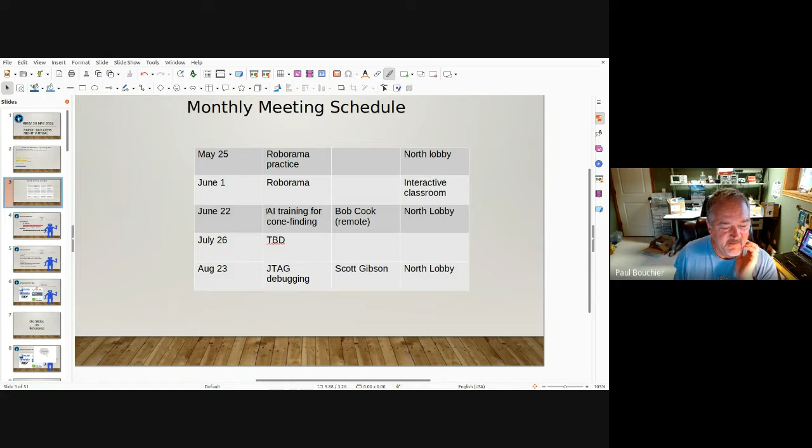We did have a change in dates. Come on, why aren't you advancing? Because I'm not clicking the right screen. So June 22nd is the next meeting after Roborama, and I'm very excited about that. Bob Cook from up north with you guys is going to be talking about his latest advancements in training AI for cone finding. This will be an all virtual meeting, so there won't be an in-person meeting at the Dallas Makerspace.

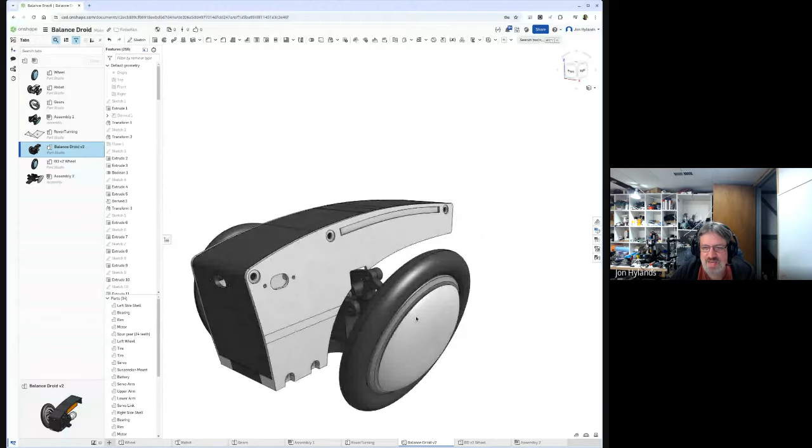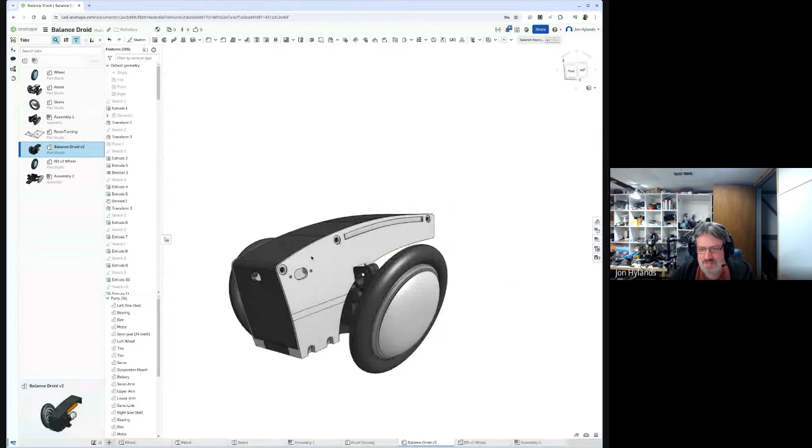So let me grab my window here. This is sort of the second revision of this robot that I'm designing. It's similar to his in that it's got the same sort of basic swept-back body shape, with a little jet engine thing here, and the wheels at a kind of funky angle. This one, as I said, is basically going to be a robot.

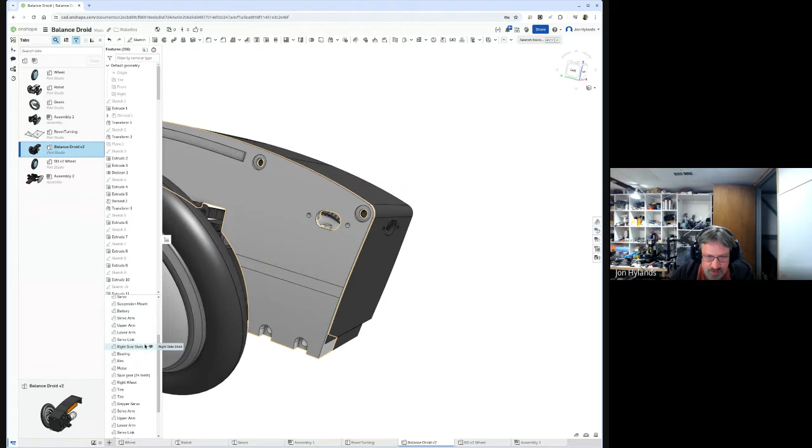If you look at the inside, I've got a battery. The IMU is going to be mounted here. The microcontroller, which is an ESP32S3, is going to be here. The motor driver's down here. There's a voltage regulator here. This big orange thing is the battery - it's an 1100 milliamp hour 3S LiPo. And there's a power switch at the very back that goes here.

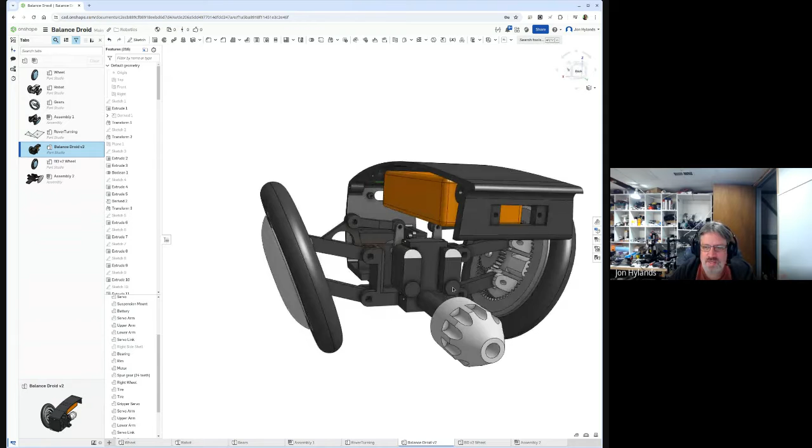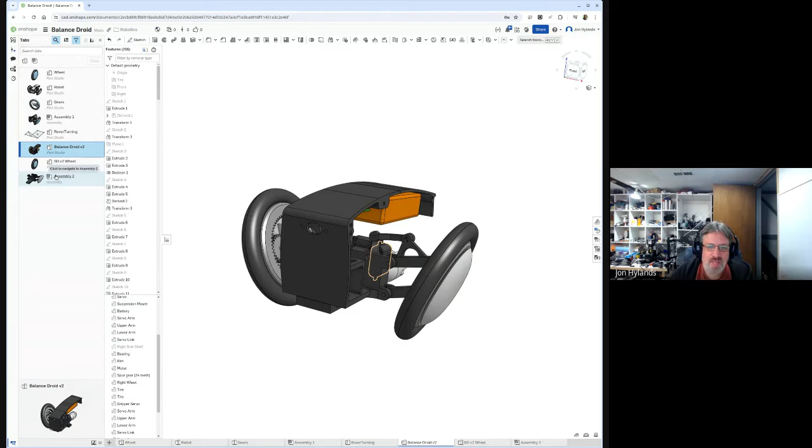So one of the neat things - I've modeled this in Onshape like I model everything, and Onshape has this interesting capability. The other thing this has is a couple of really tiny micro servos to actuate the suspension. One of the things I want to be able to do is test the range of motion of this thing. Onshape has these things called assemblies that you can set up - you basically import the parts you modeled, and you can set up relationships.

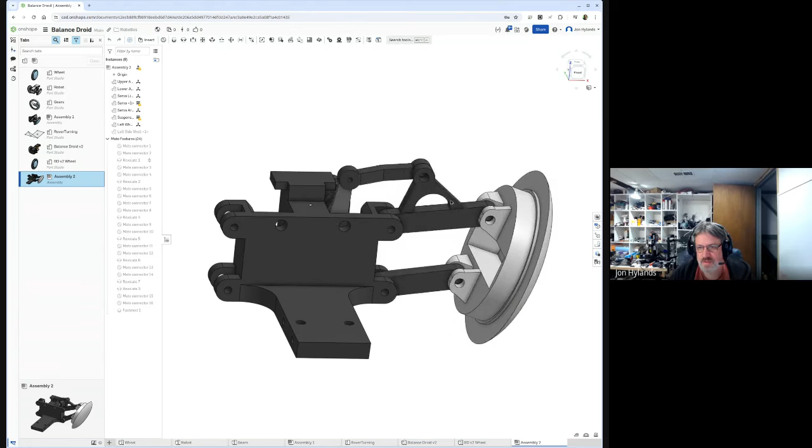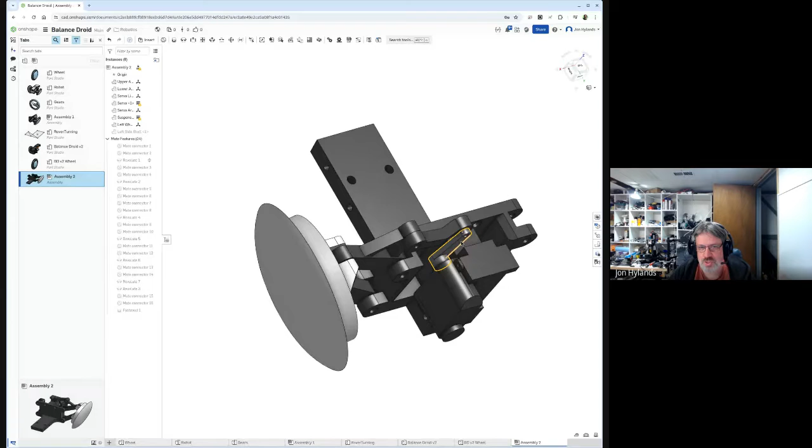You specify a mate on two different parts, and it's sort of like a pivot point in this case, because I'm using what are called revolute mates, which basically just rotate. So this whole thing constrains itself to move all of the parts that are connected with these revolute mates, including the servo arm here attached to the servo, which is also done with that. And that one I've actually restricted the motion of - in this case, it's minus 15 degrees this way.

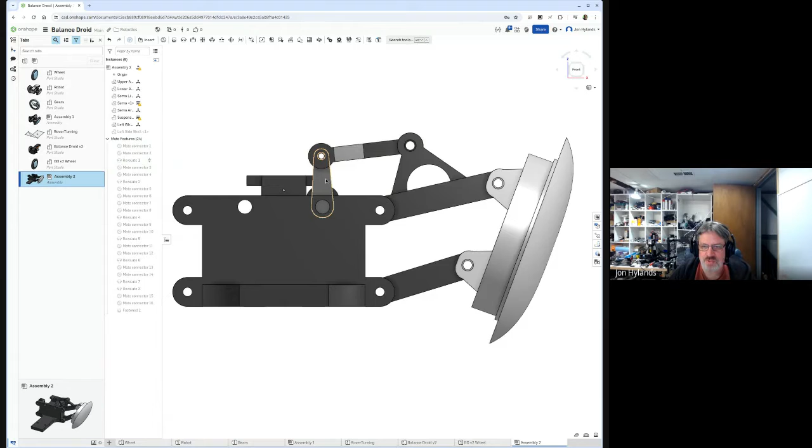So if I just turn this off here, this is basically 0 right here. If I'm looking at this from the front, straight up is 0. This is minus 15 degrees, and this is 55 degrees on this side - you can see it's a little bit more than 45 degrees. So that basically shows me how this thing will move when I've got it running.

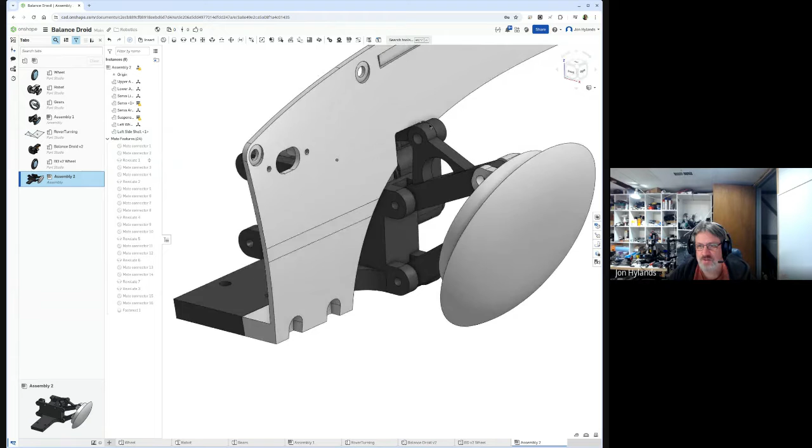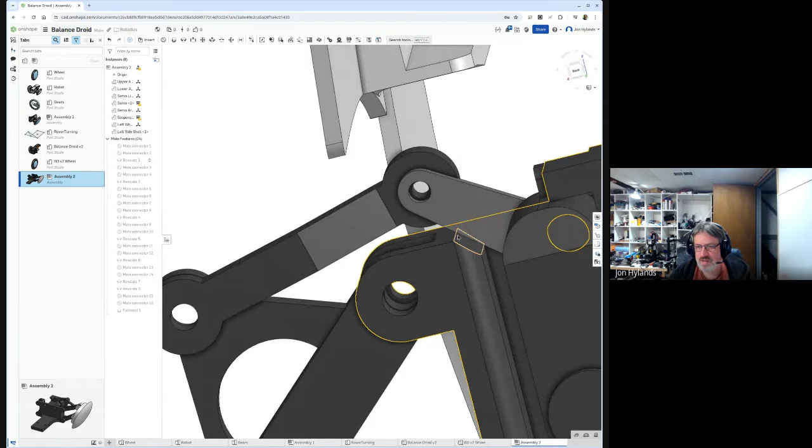And then I imported one of the side panels here so that I can look at the clearance. You can see there's a little tiny bit of intersection there, but I'll probably just make this a little bit rounder. And over here on this side, when I'm all the way down on this arm, I actually beveled this part so that the arm can go down a little bit further and make the suspension go down, which will basically raise up the body when you do that.

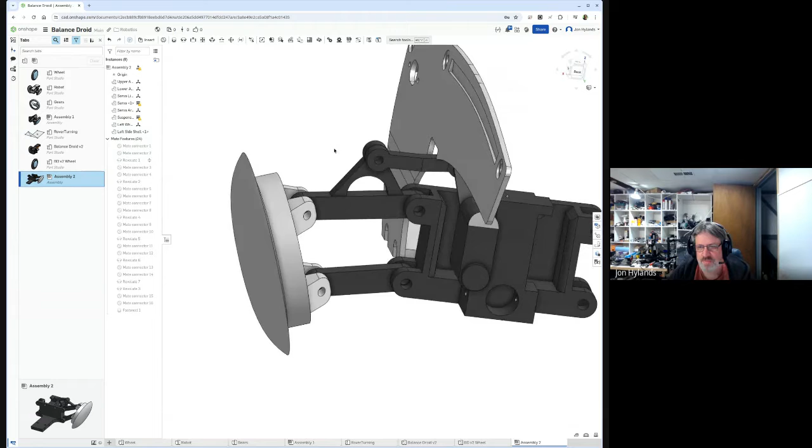So anyway, that's one of the neat features of some of these advanced modelers. Fusion 360 does the same thing - you can set up assemblies like this with constraints. And SolidWorks, of course, which is kind of what Onshape is based on. So anyway, I've been - sorry.

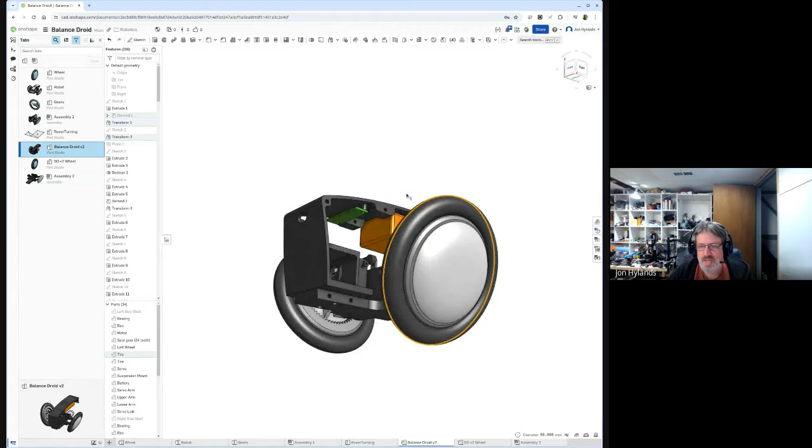What size is the wheel? This wheel is 90 millimeters in diameter, so it's a little under 4 inches.

So for instance, let me go back here and stop sharing my screen. If you look at my monitor, this is half of a wheel. This is printed in TPU, so it's flexible.

So I'm just in the process of printing the wheels now, just printed this morning. But I've got a lot of the other parts already printed, with how these things are going to go together - the side panels and the front piece. Designing a robot like this is always a bit of a jigsaw puzzle when you're designing it completely 3D printed, because you have to do the whole thing in CAD and then print it out.

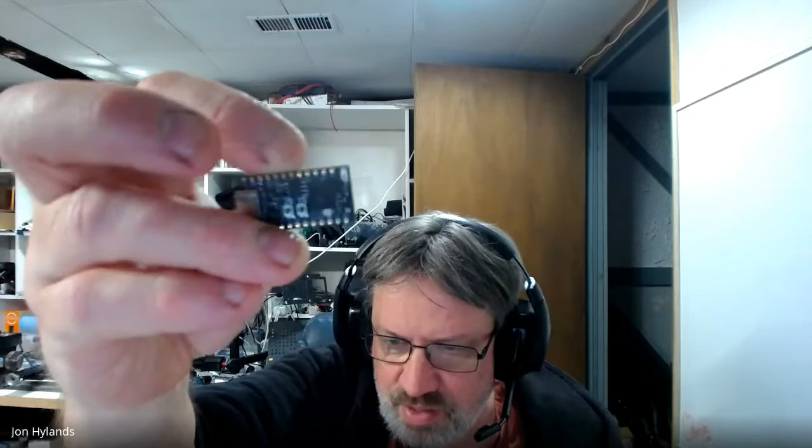So this is the main part. And for instance, this is a board from Unexpected Maker, called a Tiny S3. It's an ESP32 S3, you can kind of see it there. It's got 8 megabytes of PS RAM and 8 megabytes of flash, and I run MicroPython and we have access to that.

It's going to sit in a little slot I've got there, and you can see from underneath, there's little pins. There's a couple slots where it's mounted that are holes, so that board goes there. The motor driver sits in another little indent down in the bottom here. The 9-axis IMU I'm using is the Adafruit BNO 085, and it goes on this thing just like that.

So it's sitting at kind of a 90 degree angle. Normally you mount an IMU like this, but since it's a 9-axis IMU, it really doesn't matter which way you mount it. And on this side, I have one of these little Pololu 5-volt, 5-amp switching regulators, so it's going to mount basically right on this side like that.

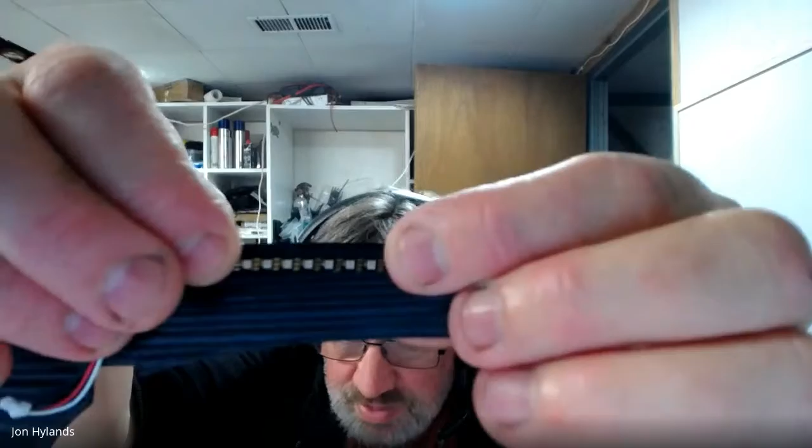And then if you look on the side of the model here, there's kind of a slot - you can sort of see it there between my fingers. I have these little NeoPixel, very small NeoPixel things, and they're going to basically sit inside that slot like that. I have to solder a couple of them together for each side, but then I can make all kinds of glowy light patterns and stuff.

Very cool. Any plans for an eye? That seemed to figure very bigly into Adam's visual concept. So next rev, sure, because I'll want something like a Raspberry Pi Zero if I'm going to put a camera in it.

But the thing that I was thinking would be really cool would be to build one of these with about a 6-inch wheel, and then I could use a brushless motor like one of these - this is a big one, I think it's 92, almost 4 inches in diameter, 90 millimeters. So this is one of these big, powerful brushless motors. I'd use that as a hub motor, and then if the body's that much bigger, I can put a Raspberry Pi in it, an OAK-D Lite camera, whatever - all kinds of different things. So that'd be kind of neat.

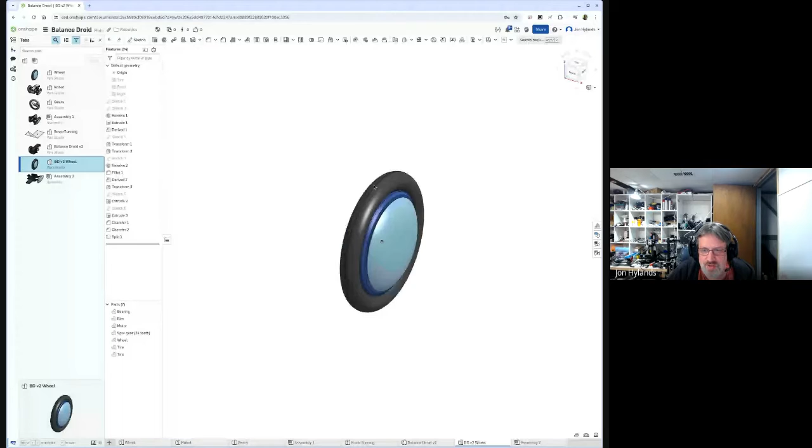I'll go over to where I developed the wheel here. So the idea here - we'll just get rid of the spur gear for a second - this is the right angle motor, or the motor with the right angle gearbox, with the shaft coming out like this, and then a spur gear that the motor's driving, which then drives the wheel itself.

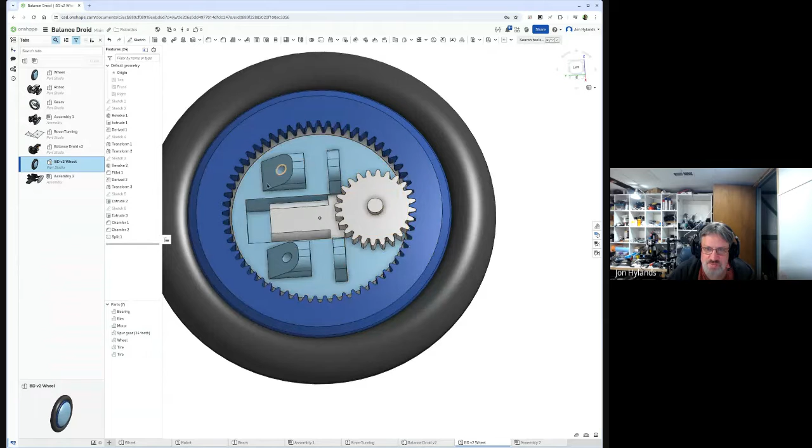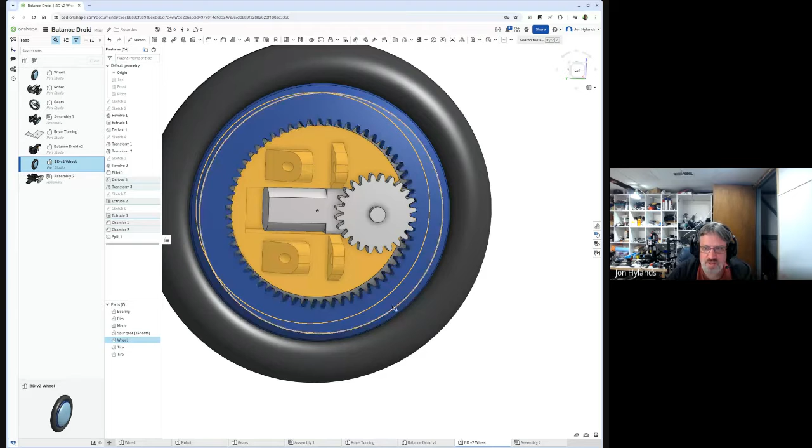This part here - whoops, that's not what I wanted to do, I wanted to do this - this part is fixed to the body, and there's a very large ball bearing, like 3 inches in diameter, or two inches in diameter, that's inside here between the wheel and the rim, which is the part that has the gear that actually rotates with the tire. So there's a big bearing, you can just sort of see the bearing right there.

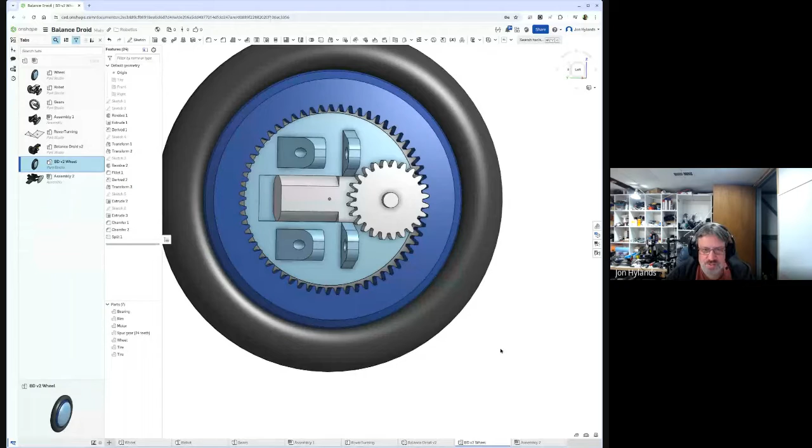Wow. I like the whole thing, and you can see it in there. So yeah, this basically drives it on each side, and the gear motors that I bought come with encoders, so I'll be able to do accurate distance and straight line runs and that sort of thing with it. There's an encoder built into that tiny thing?

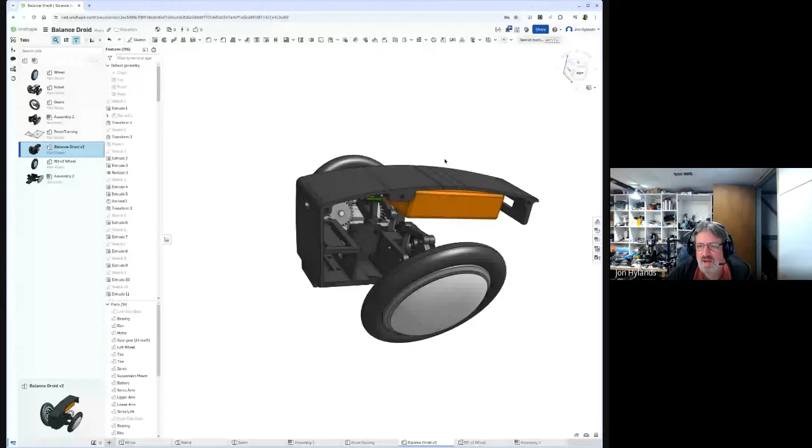Well, that's really cool. Do you have any techniques you're using for getting it so it's going to be reasonably balanced when you assemble it all? Well, let me show this guy here, sorry. So if you look at it, right now the battery is a little bit on the back side, and the microcontrollers and stuff, which aren't very heavy, are all in the front. So I may have to actually add some weight to the front.

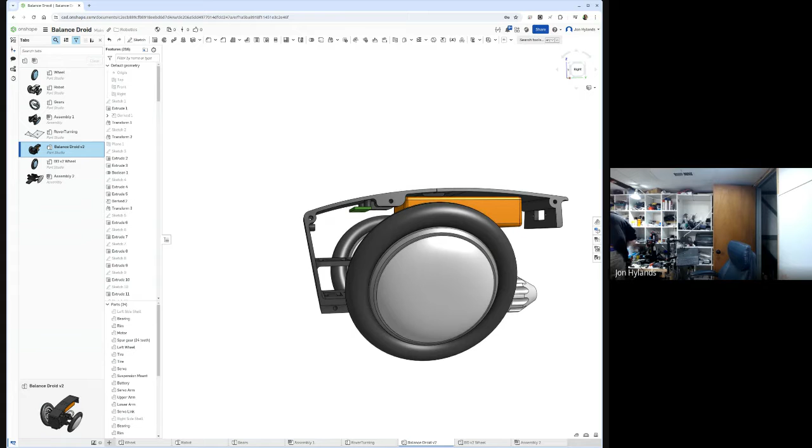One of the things I'm considering, I can just use a brass bar, but I have this right here. Oh, here it is. If you look at my screen here, this is a 1/2 inch diameter brass rod, solid, very heavy. I also have a 3/8 inch diameter tungsten rod, which I can cut with great difficulty. Tungsten is actually quite a bit heavier than brass. It's heavier than lead in terms of density. It's not as heavy as gold, but it's heavier than lead.

It's why the military uses it in the normal armor-piercing rounds that aren't depleted uranium. But anyway, it's an interesting weight. I might just use brass though, but the idea is that once I figure out exactly what I need, I can add a piece of weight up at the top, because with a balancing robot, you want all the weight to be at the top. So I'll add a piece of brass or tungsten up near the top to make it sit properly. And because I'm 3D printing these things, I can just print a bracket right into the part that the piece of metal slides into.

Cool. So it's like, see how it turns out and then adjust. Basically, yeah, that's kind of how I build robots. I'm not a big believer. I understand people like to do all kinds of mechanical fluid stuff and density calculations, and I just don't care that much. I'll build it, and if I need to add a little weight to the back or to the front, then I'll add a little weight to the back or the front.

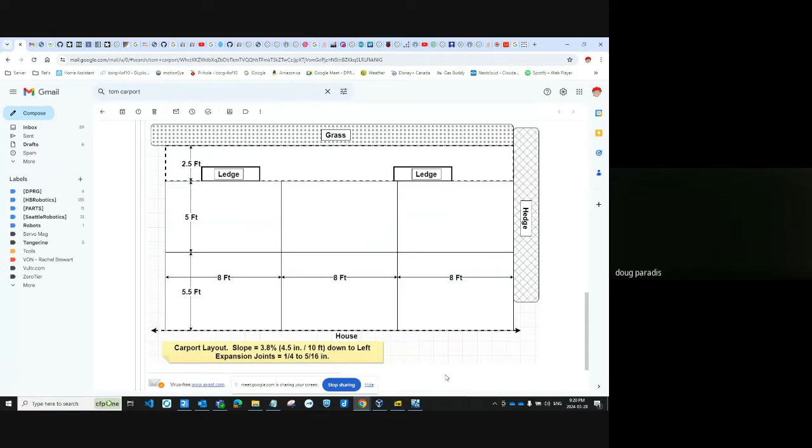So what I'm looking at is it looks like it's 14 and 8. It's 22 feet long and 10 feet. Yeah, it's about 10.5 by 24 roughly, the area. Well, you got to have space for your robot too. Exactly. So I'm wondering, is it possible to narrow the width? We can go long, but narrow the width for the 10.5 feet that we have to allow for a robot path.

Are you trying to match the perimeter length? Why don't you do this, guys? Let's see. If we were sitting at 12, that'd be 48. If you were at 8, that'd be 16, and so that would leave... Oh God, come on, Doug. Mind's a horrible thing to lose, guys. Minus 16 would be 32 divided by 2. Okay, so why don't you make it 8 by 16? So if I make that 8 by 16, I don't think my robot's going to fit through there.

Well, you got 10 feet, right? Oh, I see what you're saying. So my robot is almost 16 inches wide. Well, then go 6. So is that an issue if we went 16 by 6 or something like that? Or could you do 20 by 6? Hey, Pat, you can go outside those ledge sections. They just hold up the outer edge of the carport, and they have concrete and grass on the other side. So you can go outside of those.

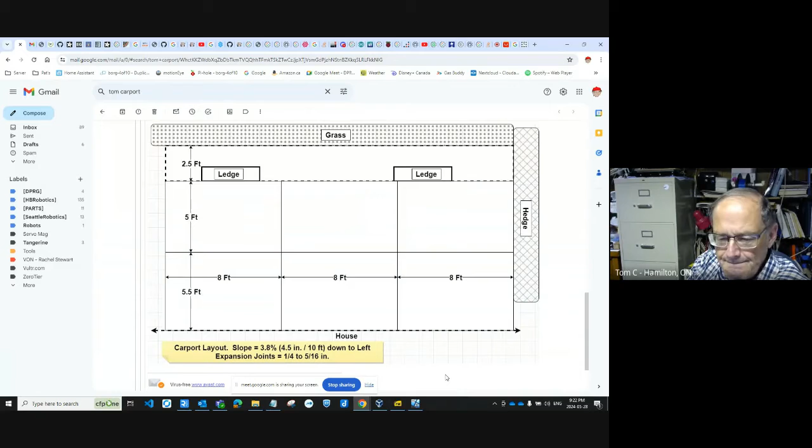I'm a little confused. Yeah, me too. But anyway, Pat, just make it as big as you can. Okay, we'll confirm with you all before we do that. All of you guys got to agree ahead of time, though, so that if you're running in four squares, nobody wants any surprises when they get there, because there's nothing worse than programming on the day of the competition. So whatever you guys decide on, make sure all of you know about it and agree to it.

Right. So, Doug, are you trying to match perimeter run length with what's happening in Dallas, so that from a timing comparison it's similar? Yeah, perimeter run length is the one thing that I would try to match. So what's the perimeter in Dallas? It's 48 feet. Realistically, when you run these contests, there's a lot more time involved in the getting ready and setting up and starting and finishing and measuring where it ended up than there is in the actual runtime around the course.

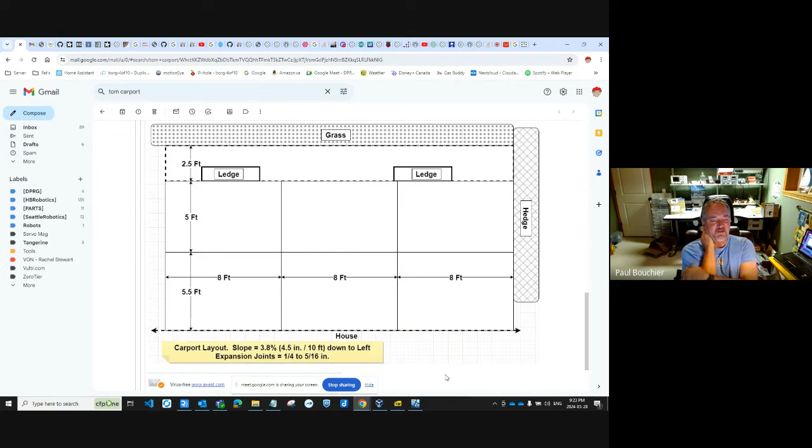So I don't think you need to be worried about trying to match runtime to try and achieve the same cadence as we're doing in Dallas. I don't think that'll be an issue. Yeah, well, once you have the course set up, now let's kind of go over a little bit of it.

For four corners, generally we take a spot on your robot. You pick the spot on your robot, okay? And so it's got to be on the outside edge, guys. It can't be the center of the robot. It has to be something where a guy can drop a pencil along the edge of your robot and make a mark. Yeah, front edge of the robot or something like that. Yeah, around on the edges. Usually we do the center or the front.

Yep. But okay. And so you make a mark on the ground, usually on blue tape. All right. Okay. And then you make your run, take another piece of blue tape and make a dot on that one. And then the distance between those two pieces of blue tape is your distance. Okay. And I believe the rules say that if you're within, I don't remember if it's a quarter of an inch, you're just considered perfect.

And the reason for that is you don't want somebody going and say, well, I'll do it in metric, I'm 7.5 millimeters, where the other guy says, no, I'm 7.4. You know, we're just going to say, well, if you get within 6 millimeters, then you're good. Then you're going into time. If you get guys that both have 6 millimeters, you're doing time.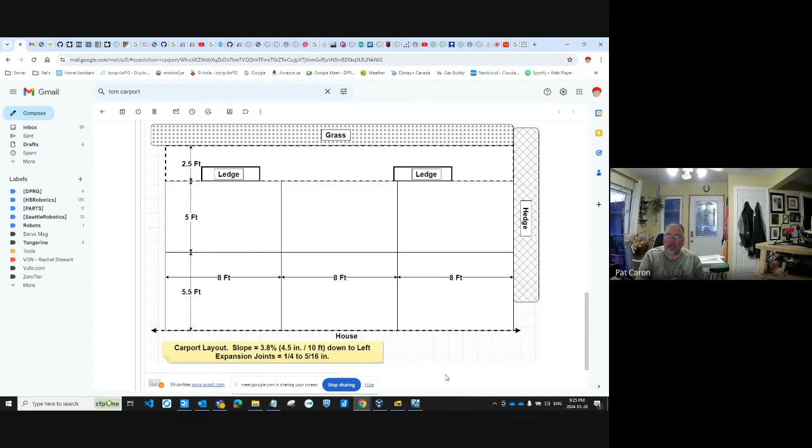Okay. The other question I had is the start location on the course. You can choose direction and starting point, and there is a smart way. Otherwise, if you start in a corner, you're going to end up having to do an extra 90. Exactly. So I started halfway down the long edge when I did my last course, and that's perfect, Pat. That's a good idea.

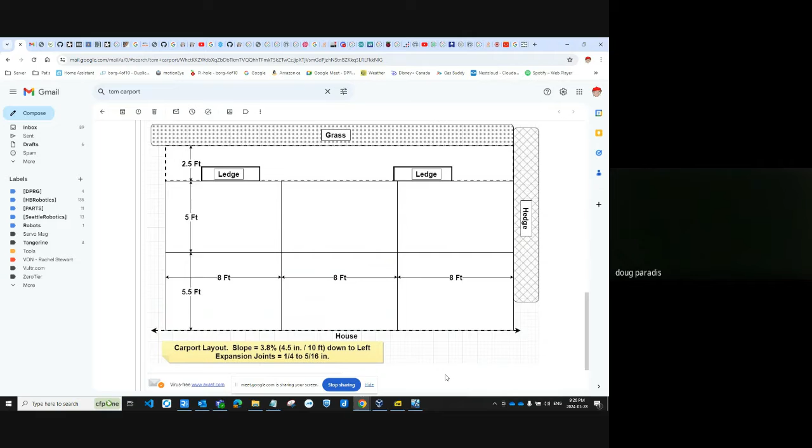And like I say, usually your robot will run better one direction than the other. I mean, in truth, you're supposed to tune that out, but there comes a point where even tuned out, one way is going to be slightly better than the other way. So you pick the direction you want it to run. And you guys are probably not going to be used to this course because it's just going to be set up right there, and you never practiced on it, unless you do it right before the runs. And so you might end up putting a little offset into your position or something at the end.

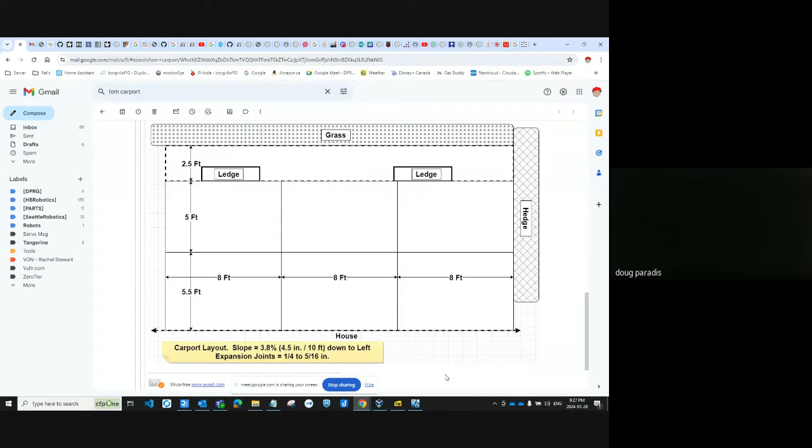Hey, Doug, you said that if multiple robots achieve a perfect score, time distinguishes between them, but that's not in the rules as far as I can see. Yeah, I believe it does. I believe it says that if there's a tie, then speed. I'm pretty sure. I don't think so, because let me just share that.

So here it says, since it's hard to determine accurately distance less than a quarter inch, robot scores less than a quarter inch will be considered to have a perfect score. Where multiple robots have perfect scores, they'll share first place in the competition. I guess we said it that way, this one. That's different from every other contest. Dave Anderson must have got to me. Okay, well, I linked in directly from here, so that's fine. Okay, so if you're within a quarter inch, you share first place.

Well, how we'll do that though is not quite that way. What'll happen is, let's say two of you did it, you would take the first and second prize and split it in half. I think that's, well, I don't know. What do you think, Paul? Yeah, that seems reasonable. If two of you go and get a perfect score, you get $50 a pop, but the next person doesn't get second place, he gets third place. Yeah, that's the normal way. Yeah. Okay.

So I'll be happy if the robot finishes the course.

Right. Oh, and though it may not be in all of the rule sets yet, our intent is to require a person to make some goal so that they don't just put a robot on the floor and say they're third prize because there's three of you. So you should at least get around one corner. I don't know. Is that in there, Paul? Look at the rules. Is there a, like, you have to at least move so many feet or something like that? I can't remember. We tried it, like, for example, in 6 cans, I think you have to score 1 can to place.

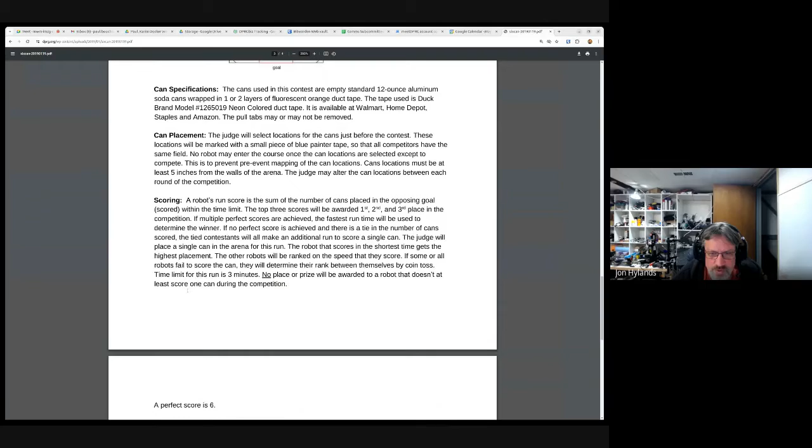No bricks. Scoring. Last sentence. There it is. No place or prize will be awarded to a robot that scores less than 1 can. Yeah. AKA no bricks. No bricks. Yeah. Okay. Well, good.

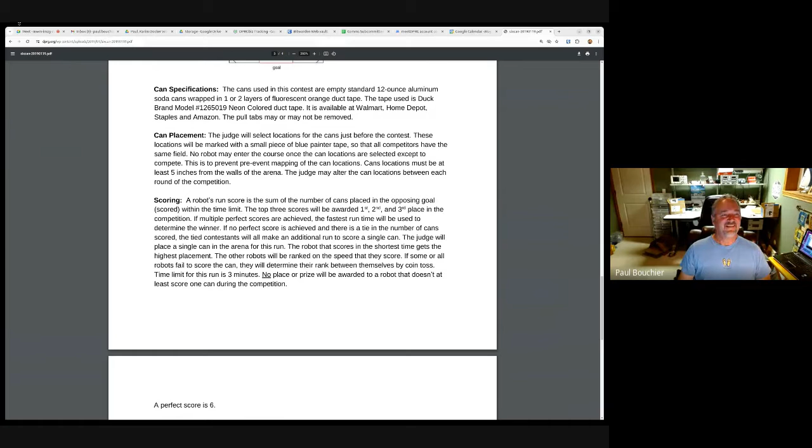You put a lot of thought into these rules, Doug, and I'm glad you're here to represent them, to interpret them. It's still fun to find the loopholes. Yeah, Ray and David have all encouraged me by finding them, and Dale Wheat was the worst.

Hey, I had dinner with Dale Wheat about a week ago. How's he doing? He's doing great. He's still making his blinky light boards and just having fun. He's active over in the other makerspace, the lab. You know, they have a really nice policy. I've got to admit, I might just join because it's so cheap. If you're over 65, it's $20. Yeah, I was thinking the same thing, Doug. Like, wow. So are they in Richardson now? Did they move from Plano to Richardson or something?

Yeah. Richardson tried to revive their downtown area, and so they ended up supporting that makerspace. I don't know, I think they help them with the space, the actual physical building. I got the impression they might even be funding them for purchase of tools and such. Yeah, that's kind of weird. I think Richardson had to close a bunch of schools, I don't know if it was lack of funding or the population was maturing and there were less kids around.

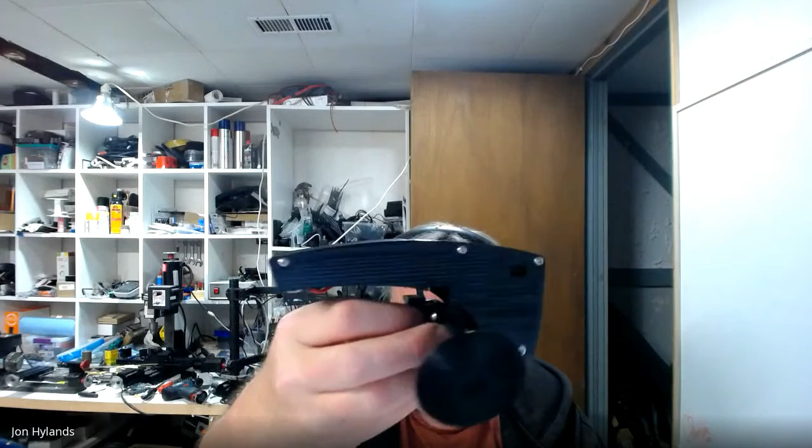Yep. Just finished putting this thing more or less together. So it's got most of the electronics, although not any wires or anything inside, and the battery seems to feel pretty decent. These are just sort of hanging here because I've only got one of the servos. I've ordered the second one from Ali, but yeah, I'm pretty happy with this.

Cool. That is a very cool looking robot. Yeah, I mean, these are just the wheels. The tires are actually quite a bit bigger, so it looks a lot more proportionate once it's actually got the tires on it, kind of thing. But I'm also waiting for the bearings to show up, which I ordered from someplace in the US. But yeah, I'm pretty happy with this. So this is my first balancing robot.

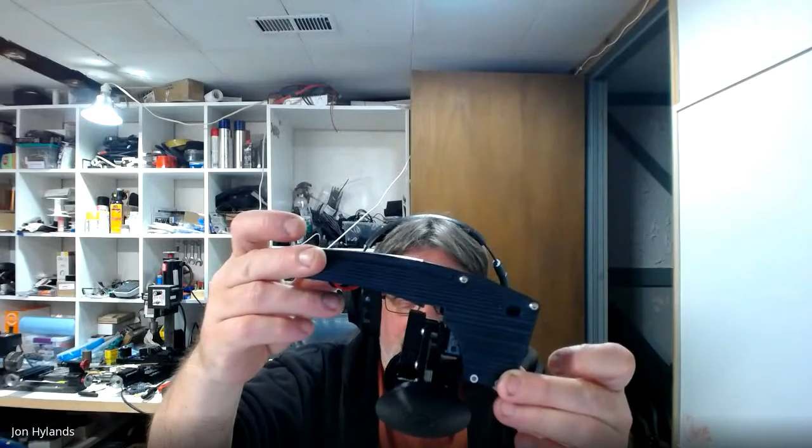It's not bad. It actually balances. If I tilt it about that far right now, it balances pretty evenly. So, wow. I'm not going to need very much weight in the front to offset the battery.

Yeah, Tanner's used to sell them many moons ago. It was like a motor with a plastic wheel, and it had like an O-ring for a tire, and the wheel was maybe 3 inches or a little bit bigger in diameter. I don't know if you ever remember seeing those. But if you used a piece of MakeBlock to attach to the bottom of that housing, it pretty much balanced itself because of the weight distribution within that gearbox and the motor. So it was like, yeah, I made a self-balancing robot and wasn't even trying to.

Yeah, I may end up changing the tire design. I'm printing this in 2 halves. It's basically almost like an inner tube, so it's completely round. So I'm printing it in 2 halves. I'm going to try and glue them together using some industrial solvent or something. But what I may end up doing is just doing a mostly ABS wheel and just having a little strip around the center that is TPU. So I'll have to see.